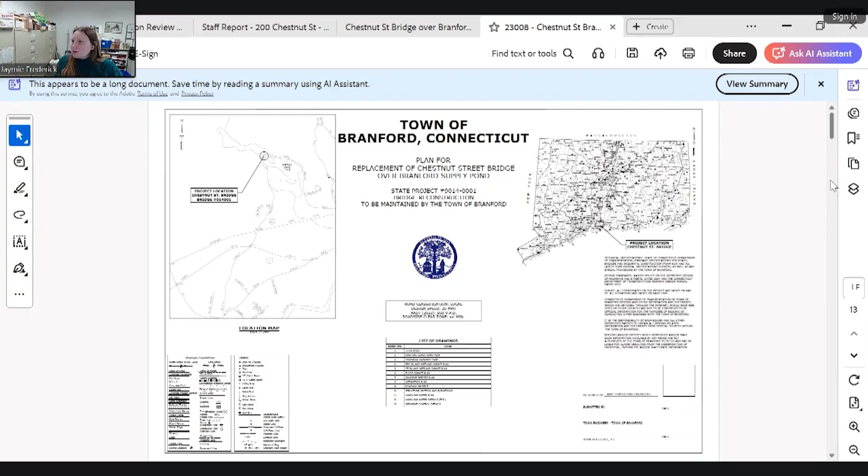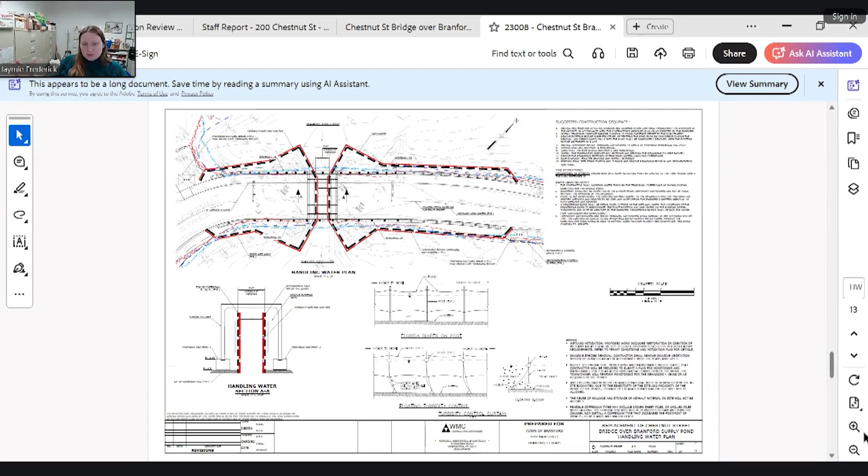While that's loading and he's pulling up the right page, I do want to identify that it has come to my attention that OpenGov defaults the attachments to be internal only, and we have to manually make them all public. There was one that we didn't make public. This should be a learning curve that gets remedied early on in OpenGov. It shouldn't be a repeating problem. So Exhibit 15 looks like it was not visible. We do have that report, and it was submitted on December 3rd. So we can walk through that afterwards.

This is Commissioner Bassermann. Jaymie, where are the emails in OpenGov? So the only email I have in here, I believe, is the one from the follow-up of the last meeting. Everything that Mr. Elder was just saying - there's an email in there somewhere? There's the email that was sent on November 14th that he was responding to verbally. The information that Mr. Elder was just talking about.

So Jaymie sent an email, which I read, and then in OpenGov was the revised site plans, because it says revised and then it has the date of when it was last updated. So there was that, and then also the project narrative. I can't remember the name of the file, but maybe it was like the project narrative or something. Let me see, those were the couple of places that I saw some. Yeah, the project narrative - it was updated today.

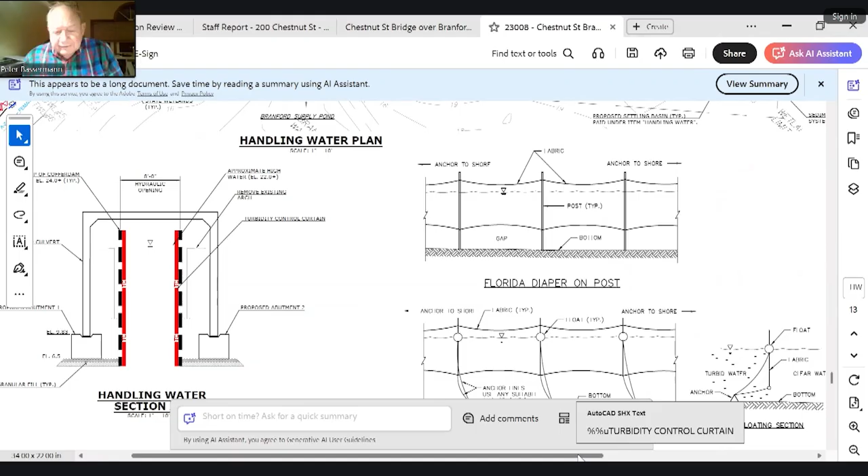This is Commissioner Bassermann again. So in the area, for instance, of mitigation, Mr. Elder indicated that there would be a mitigation application meeting, et cetera. Where do I see that? Because on the response to questions, et cetera, it says the contractor will establish a detailed plan. Is there something more recent than that that documents the fact that there will be a pre-mitigation meeting?

Jaymie Frederick, the Wetland agent. So I believe that information's in 2 different locations. Do we want to review the turbidity curtain while we're here, or do we want to jump to that question? Because I feel like I derailed where we were going by mentioning the missing document. Fine, let's get in the order of how the discussion unfolded here. But we'll deal with the turbidity comment first.

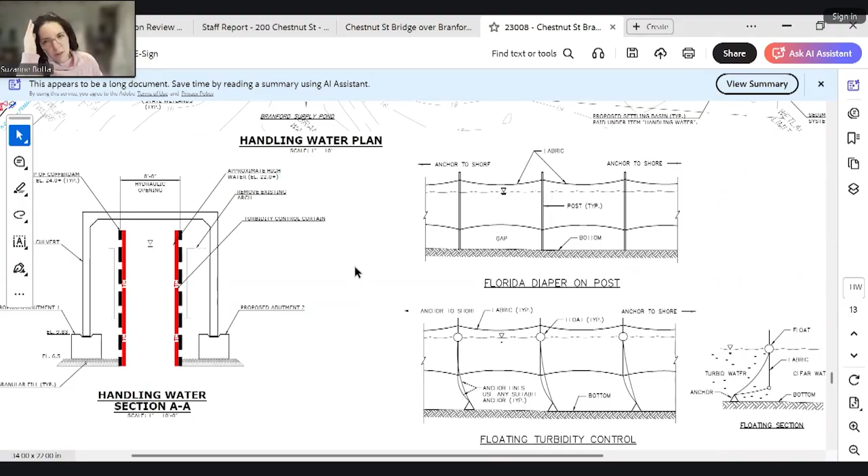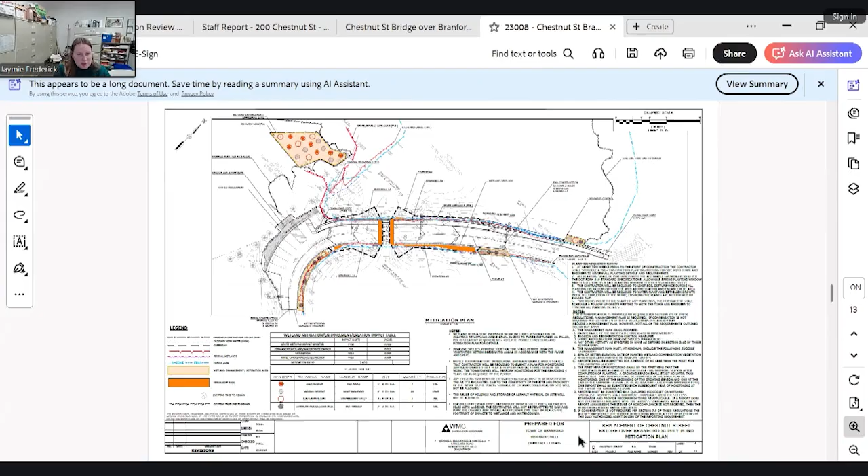This is Commissioner Bolla. You can answer that question. I have a couple, so we can come back to the turbidity curtain. Okay, so on the mitigation page of the plans, I believe that there's been additional information added. Can you just pull that page up? This is Commissioner Bolla. Thank you.

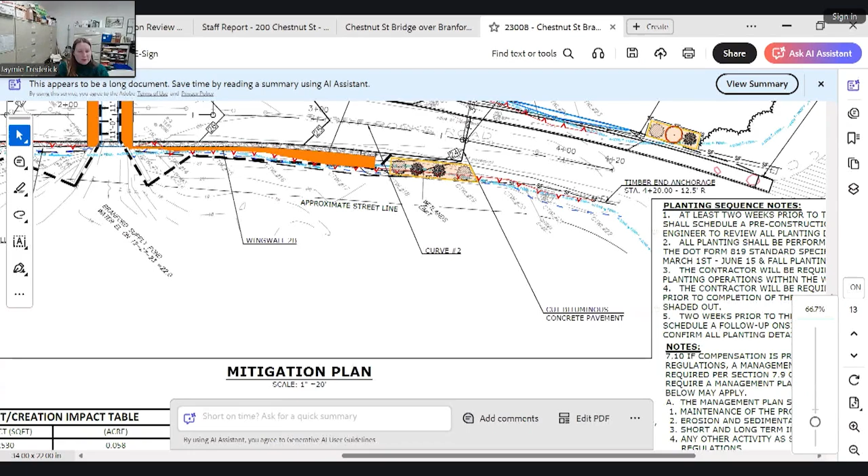As Mr. Elder identified earlier, it does call out for additional details to be provided by the contractor, so we don't have all of the information, I think it's fair to say. So I think the commission has to assess whether you have enough information at this time.

This is Commissioner Bolla. I saw in a couple of places there's this conditional language, like if this, then that, and I'm not sure why it's written that way. Generally a permit application is like, this is what we're going to do, this is what our plan is. I'm unclear as to why it's conditional and why it has to be conditional.

This is Keegan Elder again, for the record. In certain places, most jobs funded by the Department of Transportation, contractors have means and methods for which they proceed with their work. Standard operating procedure for us during design, on this project or any other state or federal project, is to come up with a plan from an engineering standpoint that is feasible for the contractor to construct, taking into account the most potentially impactful wetland or cofferdam method the contractor may elect to employ, and get a permit approved with those impacts in place, something that's feasible and constructible.

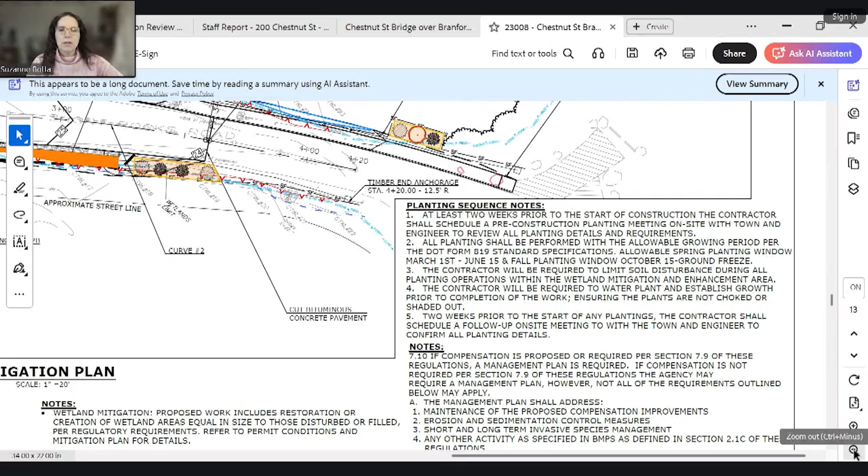It is really helpful. I'm not missing something, right? If we're all looking at this, I have a map open, but if we can all look at the same thing, what part of the mitigation sheet are you trying to look at?

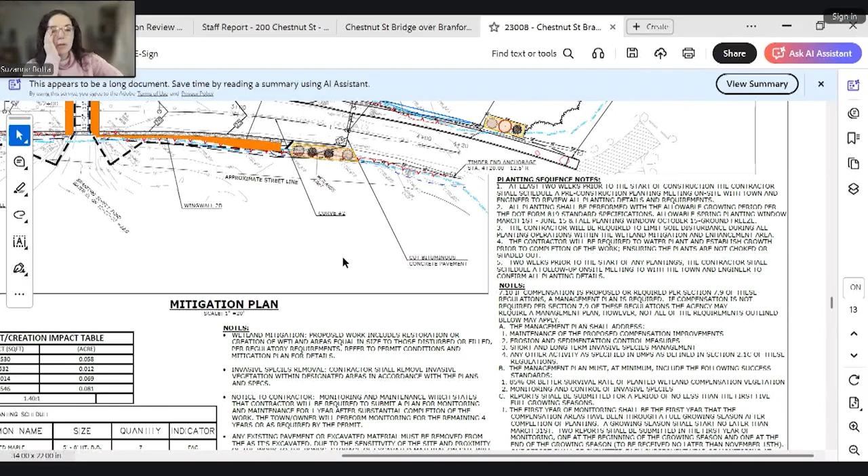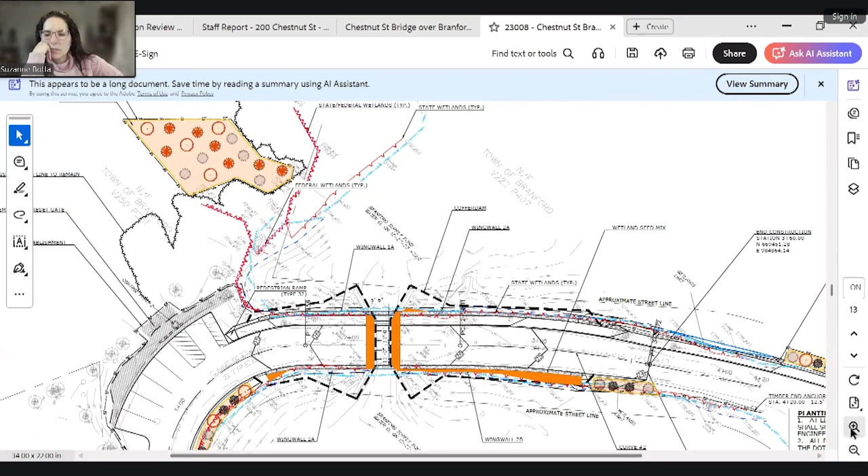So the piece that you were talking about with the Phragmites, the Phragmites removal, that would be in the wetland enhancement/mitigation area, located kind of in the upper left-hand corner of the plan. Okay, thank you.

This is Commissioner Begeman. Jaymie, it seems like when I was reading through it, there might be other times when this comes back to us for approval for various things. I'm not sure when it says must be approved, who the plans are referring to, because there are multiple permitting agencies involved. So I think that if there's something the commission specifically wants to see, that should be identified to remove any question.

This is Commissioner Begeman. To back up even further, I have a question about how the area of mitigation or invasive treatment was calculated, because my understanding is that we're going to have in this plan a 16-foot wide bridge with wing walls that go directly into the water, about 169 feet total on each side of the road, with no earth and no plants in that section. And yet in one of the maps, it was dashed yellow as mitigation area or something.

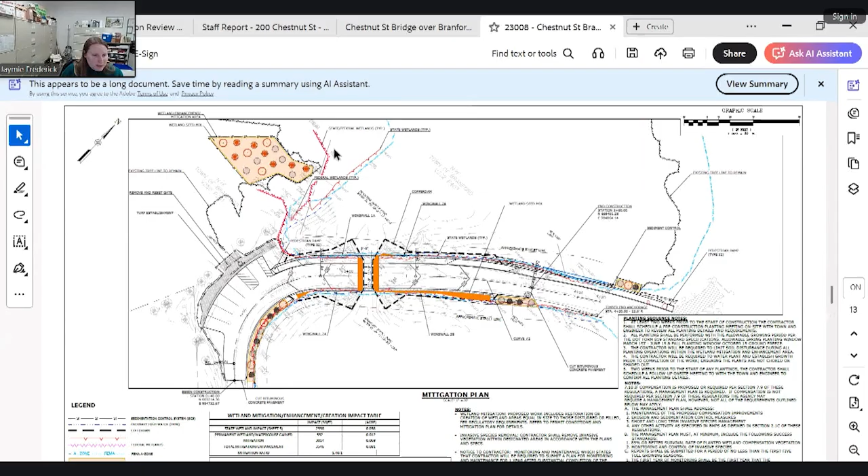It might be easier to look at the wetland impact. Commissioner Begeman, my interest is that the wetlands is getting repaired in the 1.4 to 1, because there's a significant loss. It will be a modification for sure, so there will be more open water habitat environment than there will be wetland fringe.

So the mitigation includes some areas where there will be some increase in or conversion of existing conditions. The span of the culvert is increasing, so you're going to have more watercourse in that location where you currently have the abutments for the current bridge.

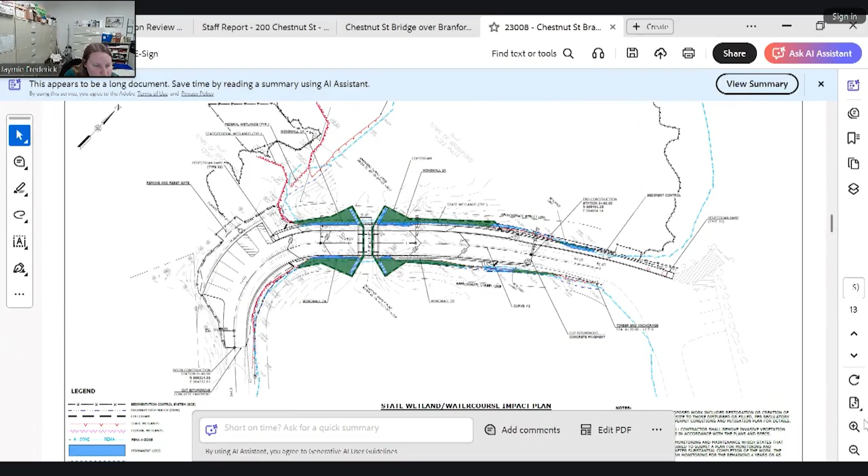The green on this is showing temporary impacts, where the water is dewatered behind the coffer dam while they're doing construction. The blue areas where the wing walls are is the permanent impact. In that green area there will be some modification, though it's hard to tell at this scale, from wetland edge to more of an open water condition.

This is Commissioner Begeman. That's a significant ecological impact to the wetland, that you're losing that number of feet on both sides of the bridge, the interface between land and open water, between water and road. We're losing that wetland, and that's a hardening of the shoreline.

So that's what I was hoping to ask the soil scientists, in terms of the environmental impact of that, and how do we make up for that impact by improving some other areas, the mitigation of the loss of that wetland, unless they're counting just open water that meets a concrete wall.

The addition—that's if that's a 1-to-1, which I don't think it is. I think it would be hard pressed to reestablish current day conditions under today's standards, because we've got the increase in road width, but also kind of the standard.

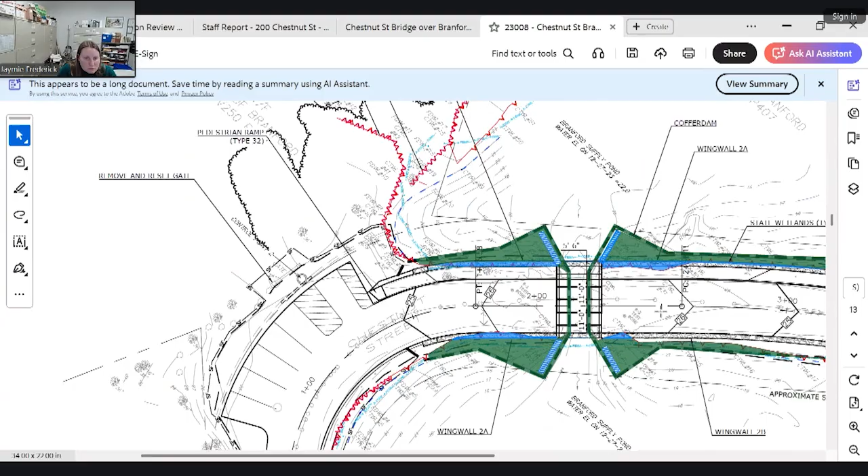Keegan, can you zoom in a little bit? You've got the mean high water line on there, and I think that would be helpful for the commissioners in reviewing where that intersects these temporary areas of disturbance. Commissioner Bolla, to Commissioner Begeman's concern—

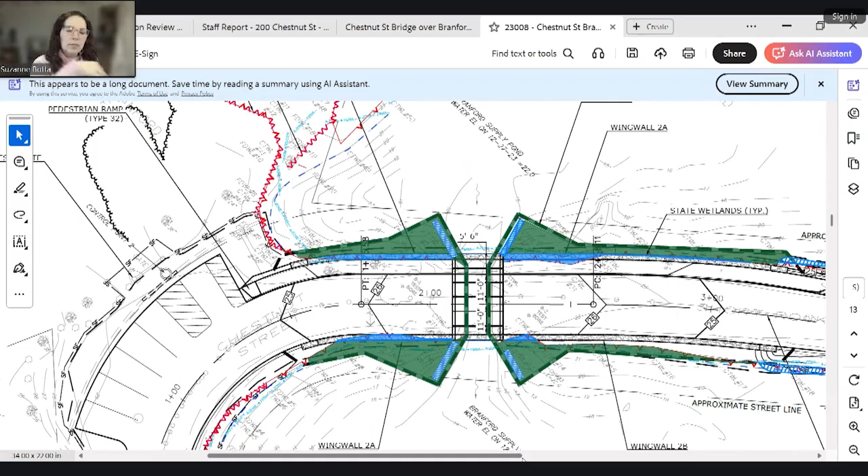Was there any consideration for including emergent vegetation since those trees are coming down in that part of the pond?

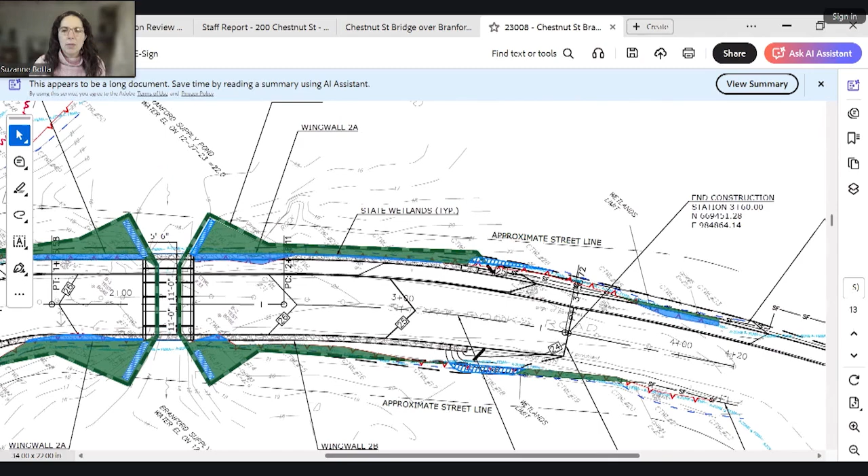Well, the trees are not necessarily coming down in the pond. Those were on the further right side of the screen. Right, there are some trees that were going to be removed where it says approximately state wetlands and approximate street line, somewhere in that area. We had talked about this corner where there's already some emergent vegetation in the summer.

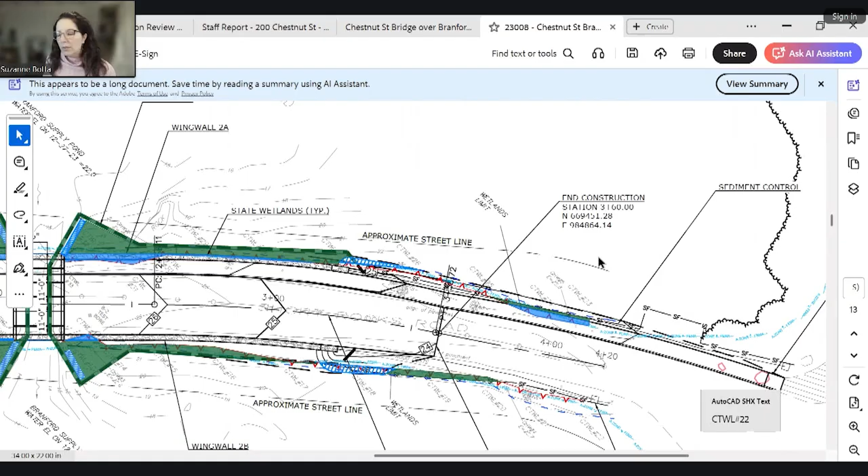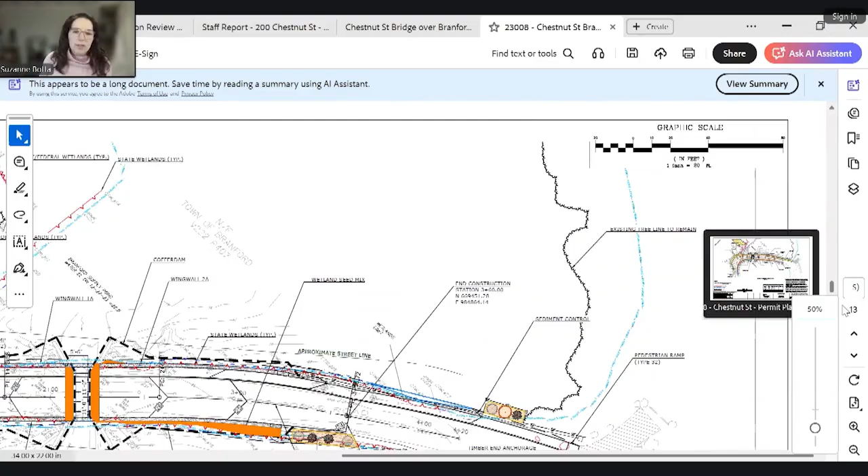There's a lot of eutrophication, so it does get very algae laden, but I'm curious if there was any consideration to adding additional emergent vegetation in the area where trees are coming down, as they're not going to provide the same kind of shading function, but they still provide some services that may offset a little bit of the impact.

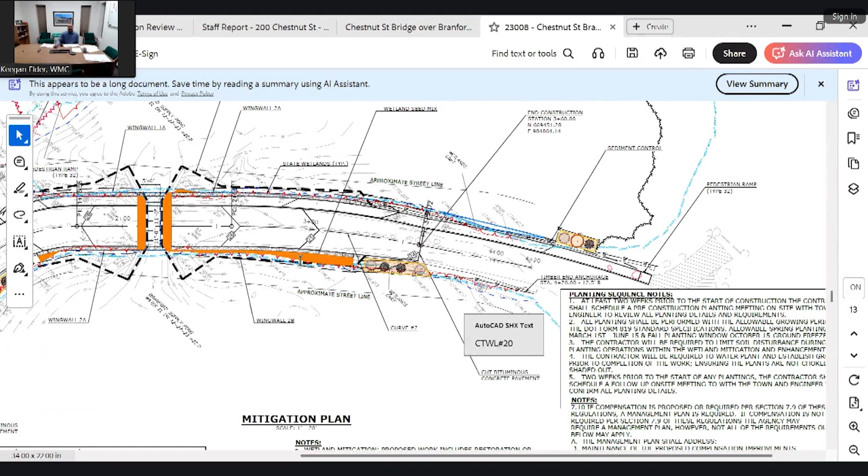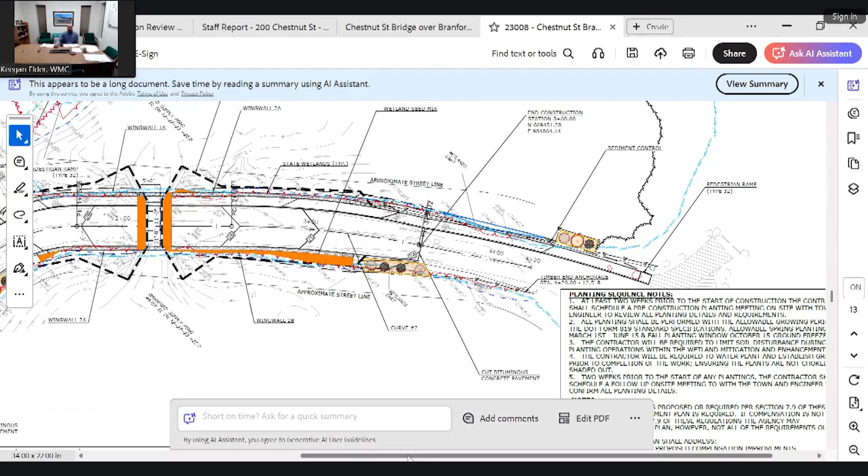Yes, this is Keegan Elder again for the record. The soil scientists did review these areas and recommended these plantings that are shown here, also in this area on the southerly, or easterly, side of the project, sorry. In addition to this area as well, in review of the canopy and what we could do to help mitigate or alleviate the loss of a few trees in the area of the walls and the bridge.

So they're shown in this location, and then also in this corner. I did talk with the soil scientist again today, and she mentioned, if we wanted to—and I spoke with John Hofferly before he left the office yesterday—if the commission wanted to add a few more trees along this area, we could do that as well.

But we're sort of limited, as we discussed at the last meeting, given the proximity of the pond to the roadway, the roadway requirements for this funding mechanism, and the guide rail and shoulder requirements. We're pretty tight and limited with how far we can go with planting trees and restoring the canopy, while still doing the due diligence of the Department of Transportation as far as roadway width, sidewalk, wall location, wall heights, and so forth. So we had a meeting of the minds with the soil scientist and came up with these additional areas for canopy on these three corners, in addition to what's shown further up.

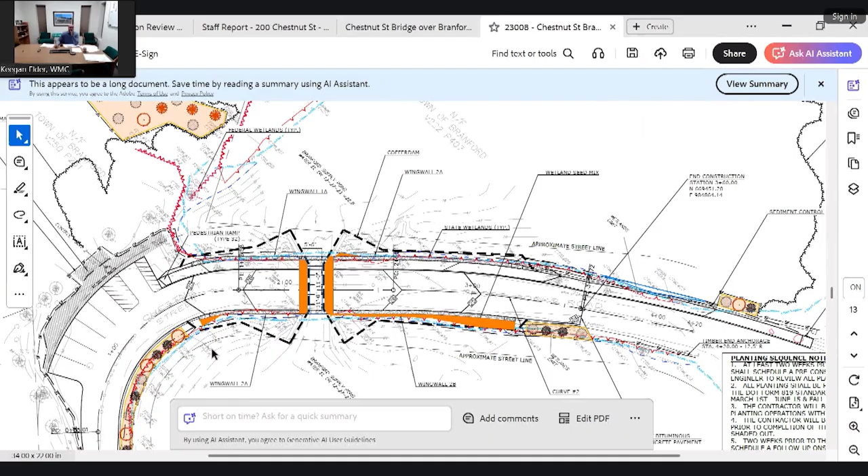This area is paved, there's a roadway, there's a lot of foot traffic through here now. There are a few trees scattered about this area, but it's not a fully grown area of trees like the remainder of the pond. But we're doing a lot to help restore whatever damage we do to that area, while keeping in mind the codes and regulations for replacing a failing bridge.

This is Commissioner Begman. Thanks for going over the alternative, because that explains the impact of going further out into the pond. Just so that I'm clear, there will be no vegetation, correct, from where the wing walls start to where they end? That is correct. Okay, just wanted to make sure.

I have a question about drainage from the road and erosion, but I don't want to go into that until people have more questions about the vegetation.

Yeah, this is Commissioner Basserman. We looked at a number of projects regarding mitigation, and unfortunately we've had a lot of learning experiences. I guess my concern is, and Jaymie, I don't know if this is a question more for you—when we say contractor, I think we've seen as part of those learning experiences that the quality of the individual supervising the installation of the material, and the frequency of the monitoring for self-correction, was important. Did we deal with that as a condition of approval, or did we want to see that as part of the plan that got permitted?

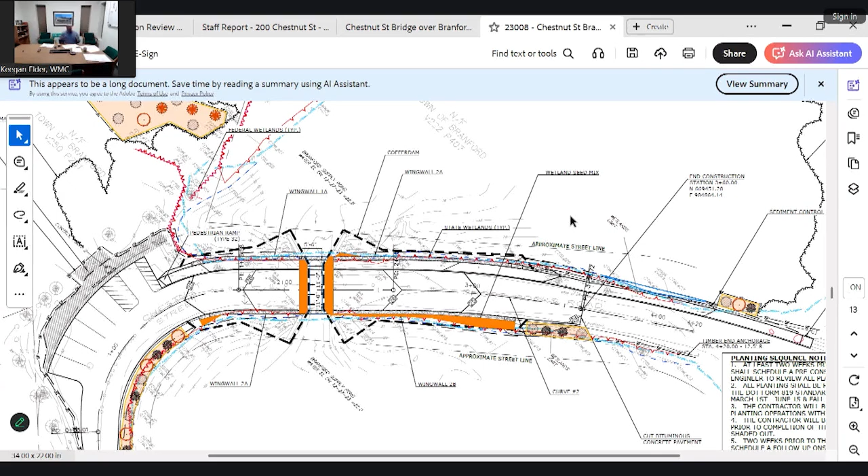So another sort of tidbit to open your eyes to how this process works. The permit plans and permit approvals are included in the bid package for the contractor's review. So any notes included in the permit plan, permit set, any permit approvals or conditions are all included in the bid documents and specification package for the contractor. He's going to get a package with construction plans that has all the details, the steel, and everything else, the engineering that goes into this bridge.

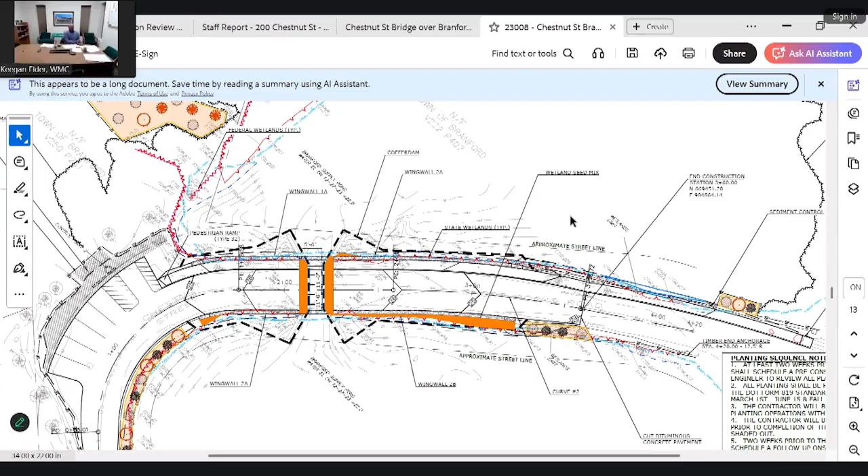He's also going to get specifications that are different from what the DOT has in their Bible. The DOT has what's called a standard specification, Form 818 or 819 at this point, which is a handbook on all construction items, what it involves, how to construct it. That's our civil engineering guideline for constructing projects. Outside of those, we have special provisions which include the invasive removal, the seed mix, the turbidity control curtains, which are atypical items in the Bible that we add specifications for in the contract.

So all of these documents, if you were to try to put them all on the plans, would be pretty crowded. But in the Form 818 or 819, the standard specification, it gives the contractor a hierarchy of things they have to follow: anything in the plans, anything in the specs, anything in the permit plans, permit conditions, permit approvals. And if the contractor varies to do anything outside those limits, rights of way acquired, or permitted limits, he has to then submit again to the commission for review and approval, any change he wants to make from any document set forth, the permit, the conditions.

When we go to DEP, they're going to have their conditions. The Army Corps already gave us theirs, well, we'll have more from them as well. We have conditions from the Department of Fisheries, U.S. Fish and Wildlife, NDDB. They all have conditions for how the contractor goes about his work that is included in the package they must follow.

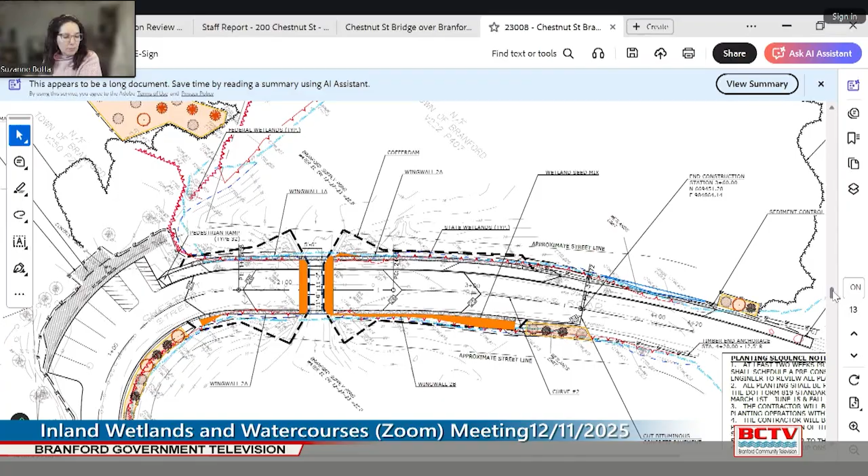This is Commissioner Bolla. I just want to return to the turbidity curtain for a minute. I know it had that standard language around using guidance from the company that makes the turbidity curtain, but we don't have a lot of call for these. So can you talk about the amount in terms of total suspended solids, the particulate size? Can you talk a little about whether there are any downsides to using this kind of method in terms of trapping organisms in one place or another, et cetera?

Without getting into the science of it... No, please get into the science of it, that would be great.

I have limited knowledge on the extra details, but what I can say is, number one, when the contractor starts work on this site, the first thing he does is set up erosion and sedimentation control and begin removal of the existing deck and roadway surface area. Species within the area generally move away or migrate to other parts of the pond, which is very large, given the amount of noise in the area.

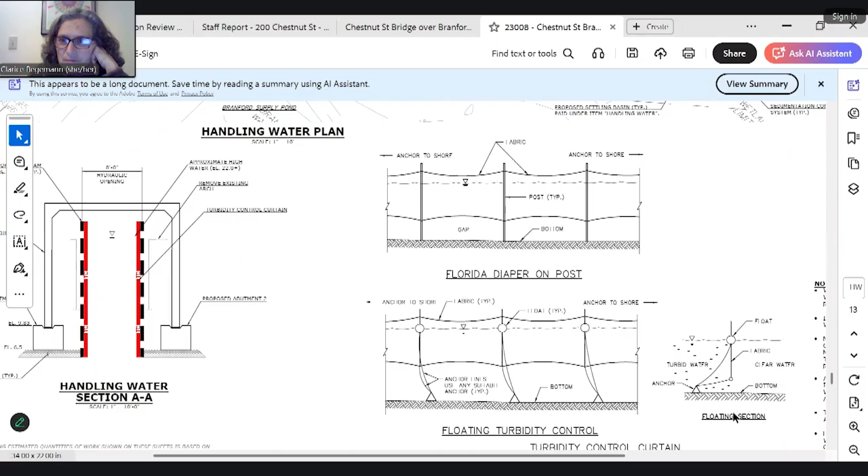So beyond the wing walls, yes, installation, so we have guide rail, there's a process aggregate base for that sort of 4-foot shelf for the guide rail I mentioned earlier. If you see on most state projects or most bridge projects where the guide rail starts at the end of the bridge, that first run of guide rail has that process aggregate base under it. And what that does, it works for two purposes.

One purpose is it alleviates erosion in those areas, but also we try to limit the amount of turf growing in those areas because it's difficult for the town or municipalities or the state to maintain. So the standard detail for guide rail shows that right at the ends of the bridges, all four corners must be protected by guide rail per the highway design manual, and that guide rail base for the installation includes that process aggregate base. In some cases, if you have a pretty steep roadway with a lot of runoff coming down, I've seen some contractors elect to use a bigger size stone, like a modified rounded riprap, just to stabilize those areas to avoid a lot of erosion. But in our scenario, this is pretty flat and relatively gentle as far as the gradient is concerned.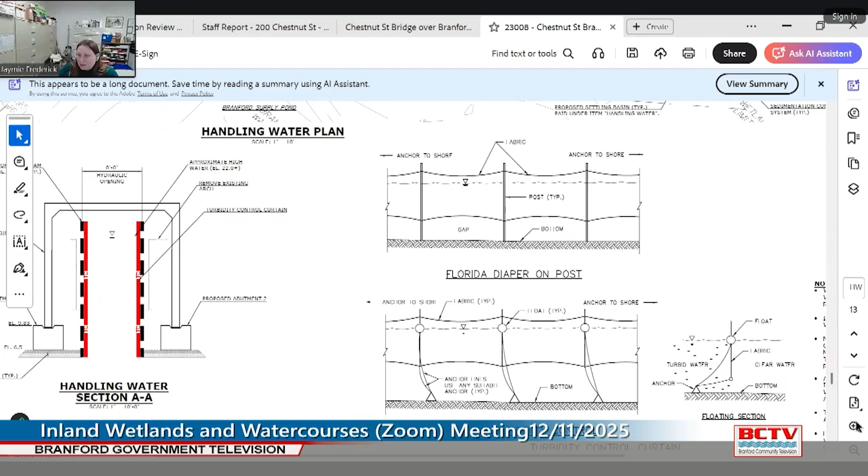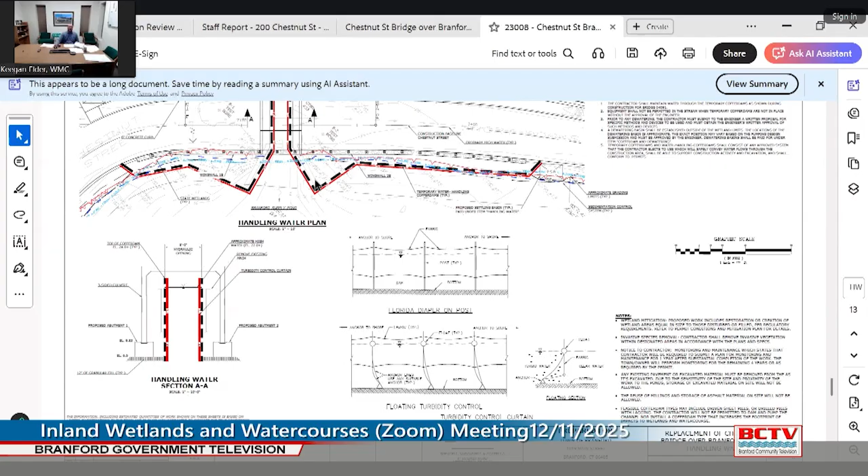Are you talking about the pumping and settling basin? I'm looking at the wrong page—I think it's the dewatering structure on the northeast. Yes, this is a pumping and settling basin, and it's a temporary structure. Any sediment or water pumped out of the cofferdam has to go through this settling basin before it's discharged, to remove the sediment.

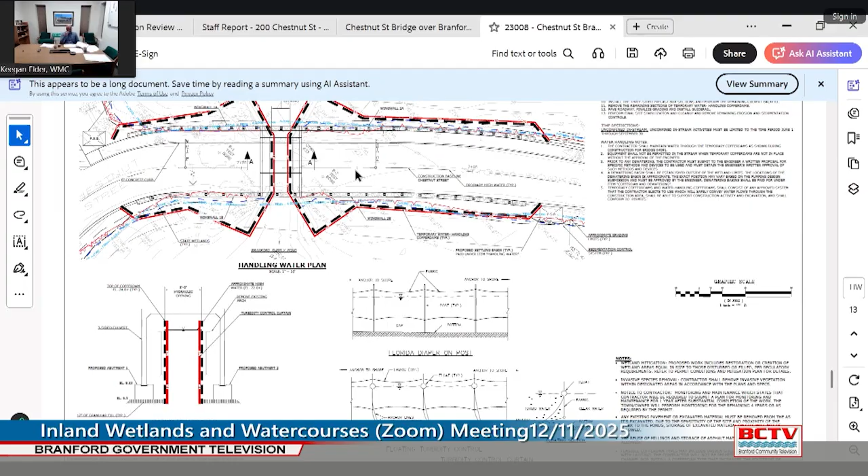Commissioner Begum asked about the northeast, the far lower right where wing wall 2B ends, where that temporary pumping station is—that's where the new plants are going to go. They'll be hit with more concentrated flows than plants elsewhere, since that water used to dissipate over a much larger area. She said she's a bit concerned about how successful that planting area will be, and noted that if they don't survive, there would be more erosion.

I could find some other projects we've done in similar scenarios with plantings and share pictures with the commission showing how it developed over the years. We've been doing this for a long time—if it's done right and correctly, the success rate for regrowth is there. The state wouldn't mandate it in their specifications and guidelines for bridge replacements if it didn't work.

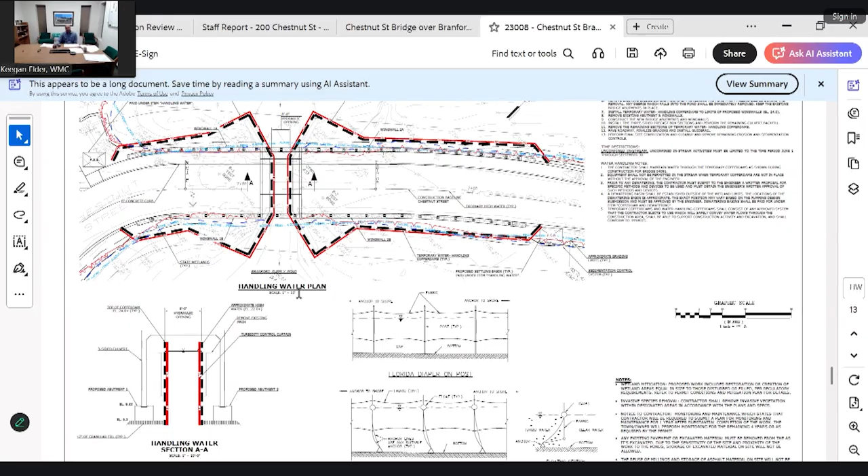This was a comment by one of the commissioners at the last meeting, to include the turbidity control curtains, and I agree that was a good call—something lacking in the previous submittal—to help alleviate some of the sediment that would get dredged up during construction.

This is Commissioner Bassermann. Jamie, the staff report that was prepared for this evening looks like it probably needs some update. Is that a fair statement, or are you comfortable with the document as it was prepared for this commission to consider?

Jaymie Frederick, the wetland agent. So the staff report, like I said, the applicant submitted a marked up staff report with some response to comments. The staff report that I prepared for this night's meeting did not have conditions for approval, consideration for conditions. I don't generally do that until after the commission's closed the public hearing and given me some direction as to where they want things to be.

That being said, if the commission is thinking about starting to head in that direction, I have some thoughts, but I also realize there's been a lot of information to digest, and I don't know where the commission has landed, or if they have landed on whether or not there's sufficient information. There's been a lot of comments that information can be provided. I'm not sure as to the timing of that information, whether we're looking at continuation and submission for the next meeting, or, like the applicant has requested, looking at conditions of approval.

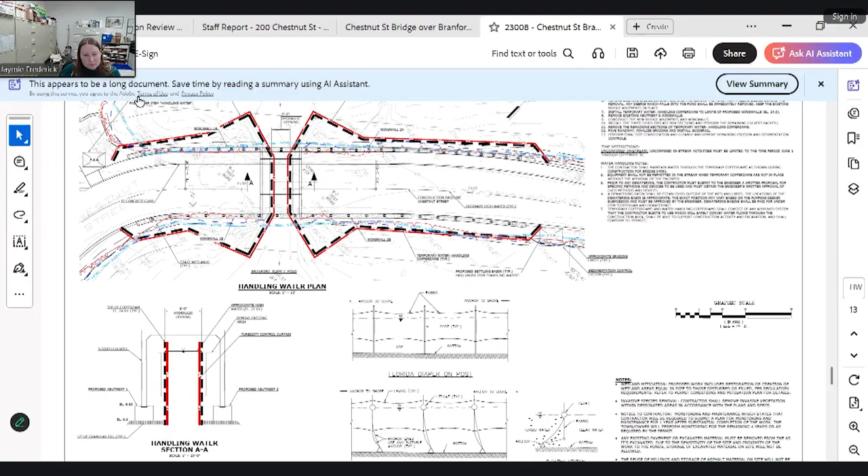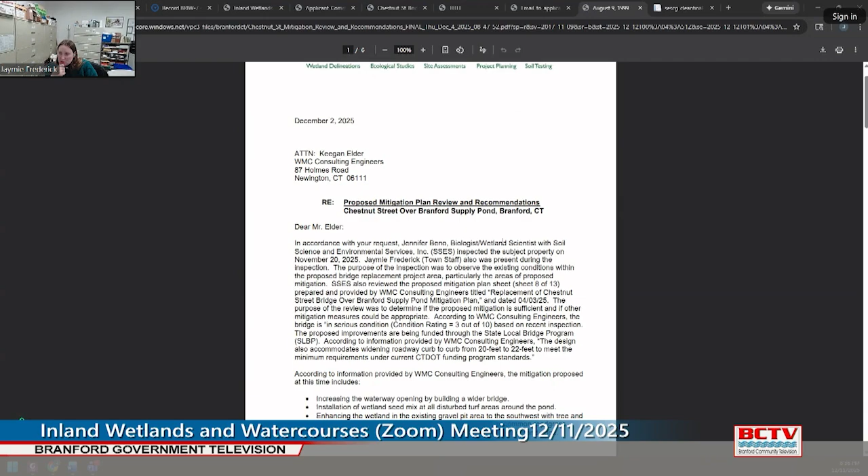Jaymie Frederick, Inland Wetland Agent, let me screen share that real quick. So Jennifer Beno with Soil Science and Environmental Services Inc. went out, and like Keegan mentioned, they've had some conversations. I also met with Jennifer out at the site, and she's had some conversations with Keegan and reviewed some revised mitigation that the commission has also been looking at this evening, and these are generally her comments based on her observations out on the site and review of those revised materials.

I'll just give commissioners a couple minutes to read it. No? And, or identify what you want to do. We have a lot of information that came in last minute here. And for us to consider a project like this with the impact on the wetlands, the mitigation issues, etc., I'm not feeling a rush to close this thing tonight.

I do think it would be beneficial if the commission—I know that we've already been on this topic for an hour and a half, hour and 40 minutes—if you can take a quick look at it to see if there's any additional things. Because I think if we're requesting a continuance, we need to be able to summarize all of the information that we're looking for.

This is Commissioner Boda. Just a thought, which is, I don't think in my experience with the hearings and how we've done things in the past that we would render a decision this evening. We don't have a full report. We don't have the conditions lined up. Typically, our process is to kind of get those ducks in a row, send it back, and then at the next meeting, make a decision.

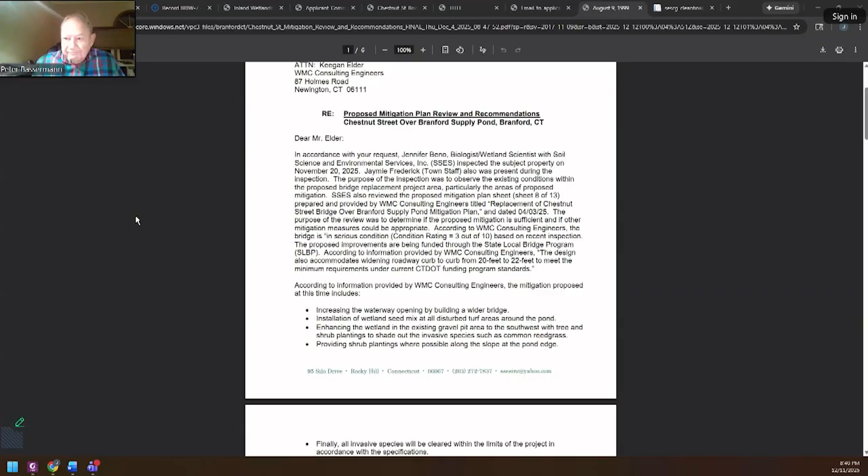Where are the other commissioners on the issue of continuation as opposed to trying to close this tonight? I'd like to hear from everyone. Commissioner Armstrong: I'm in favor of the continuance to get the additional information. Commissioner Bengman: I agree. Commissioner Sotomayor: I agree as well, it would be in our favor to have some more time to review the information that was received late this week. Commissioner Gokowski: I feel the same.

All right, okay. Jamie Frederick, is the applicant amenable to that? Keegan Elder for the record: yes, whatever the commission needs from us to move forward towards an approval, we'll be amenable. Commissioner Bassermann: do we need to now go through that list, Jamie?

Jaymie Frederick, the Wetland agent: Keegan, if you can send me an email stating in writing that you consent to continuation of the public hearing to the January 8th meeting, that would be great. So we've got the mitigation plan, which would include invasive species as well, mitigation plan for implementation and monitoring, I'm assuming. Some minor revisions to include all time restrictions on the site plan, include timing for installation of the turbidity curtain.

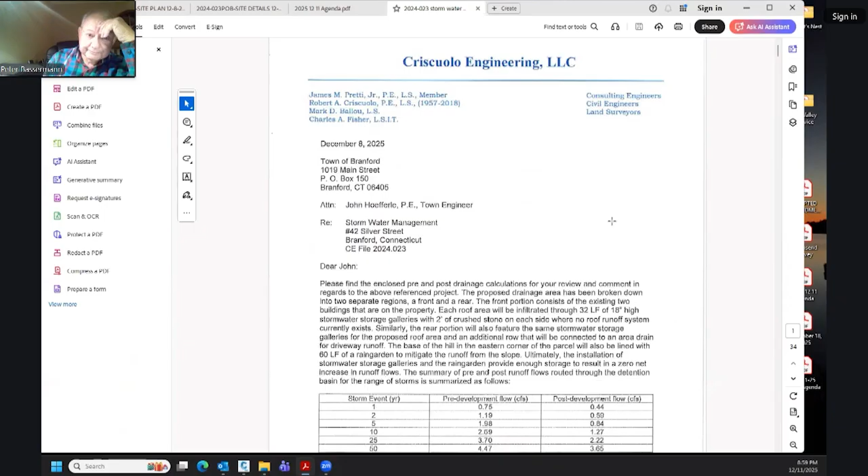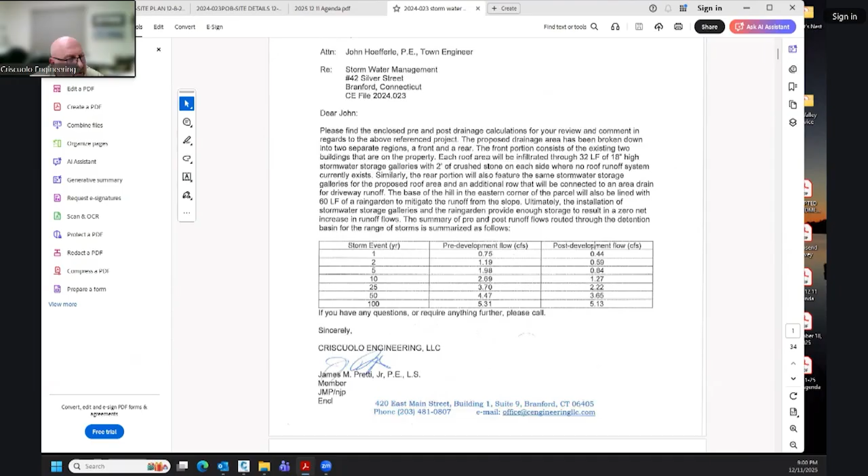So we are slightly reducing the runoff. You are correct, there is a high point, sort of a saddle, on that upper portion of the lot. All the pavement area is going toward the road, not toward the rear. Let's see if I go to...

I think we've done probably as good a job as can be done here. If you've looked through the report, the model is very complicated because of all these separate items, but I think the town engineer was satisfied with how we did it.

As far as the gravel paving, we're coming up a slope to this upper area here, and I think that's problematic. I think they're going to end up with stone all running down the driveway and into the various areas, so I think that's a mistake here.

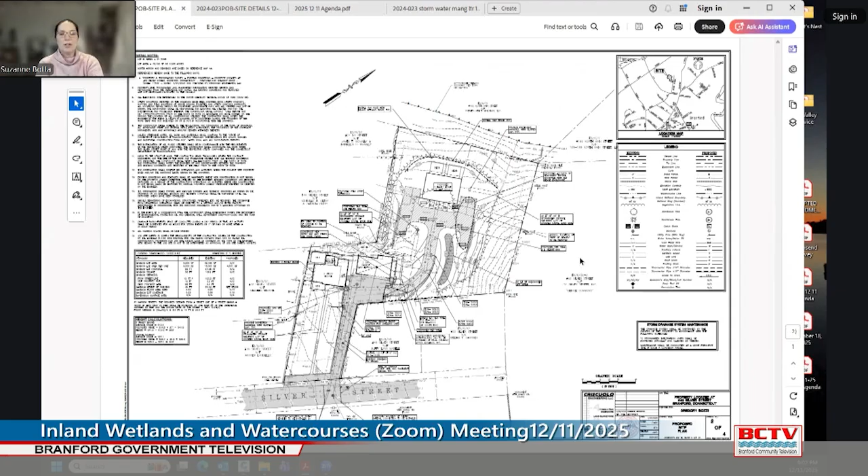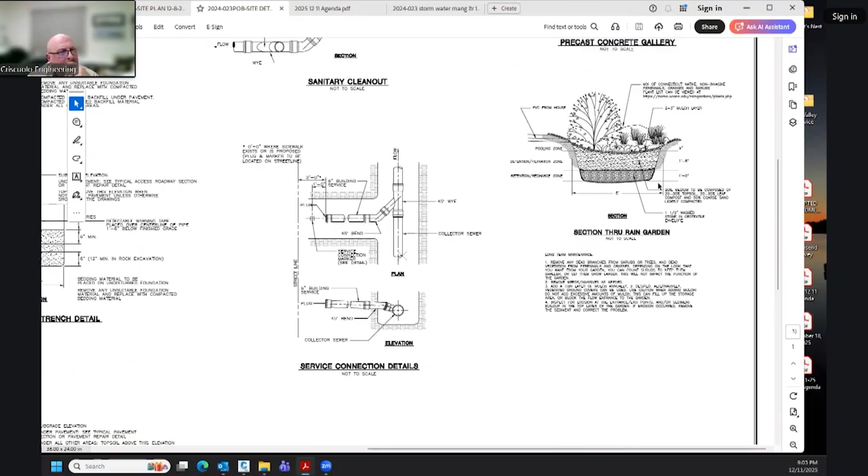How deep is it? It's about 1.5 feet of that mix that a lot of places sell now because of these rain gardens, and then there's stone wrapped in fabric at the bottom. So it's about 2.5 feet total, with a little depressed area for surface water, good to give it a chance to get in the ground. This detail originally came from the UConn site as well.

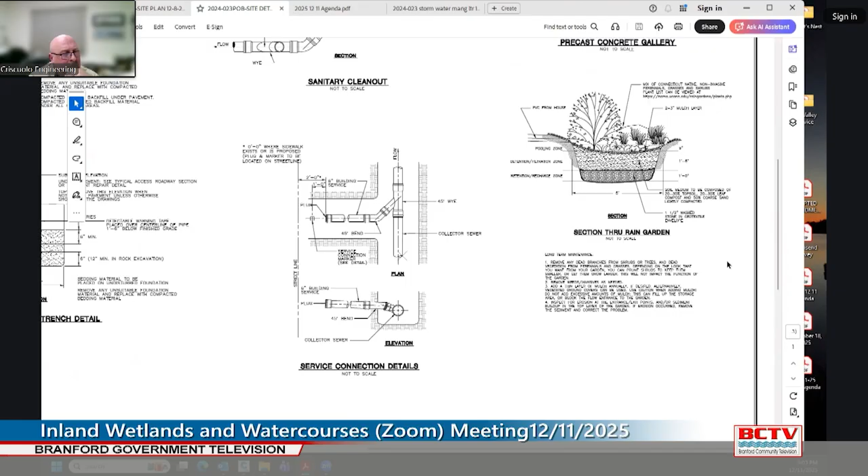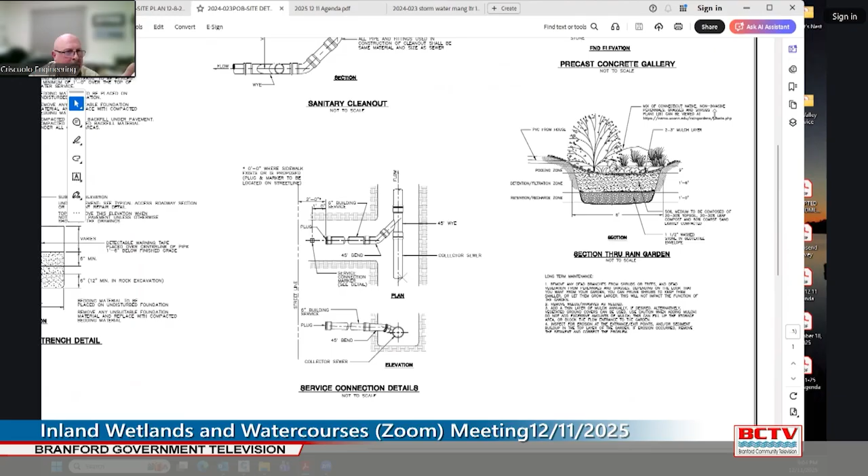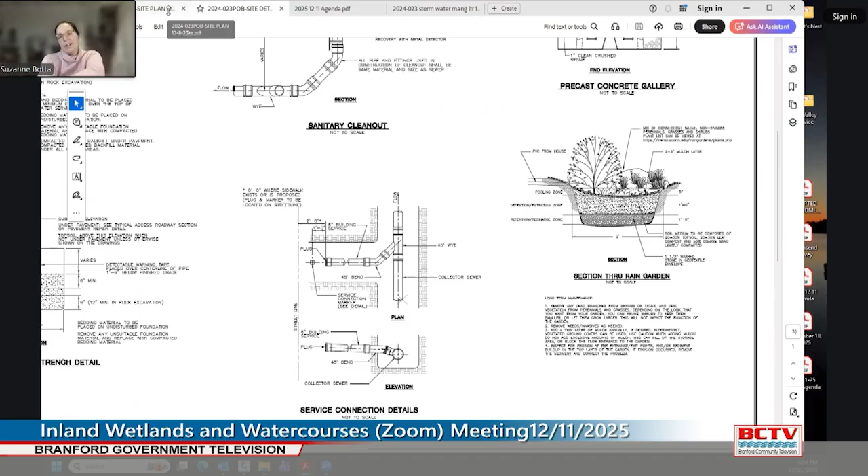Jaymie Frederick, wetland agent: I do have a possible condition for consideration that the planting plan be reviewed by the authorized agent. Yeah, and that's fair. I mean, I don't know what the owner wants to put in here, but we give them a list to pick from, and there's a whole bunch of plants there. So when the commissioner decides, then we'll submit it before he puts them in. Yeah, they don't want to put the wrong stuff in there, or it'll just die. Agreed.

Commissioner Bassermann: Jamie, you want to take us through those possible conditions that might surface? Any other questions or comments on this?

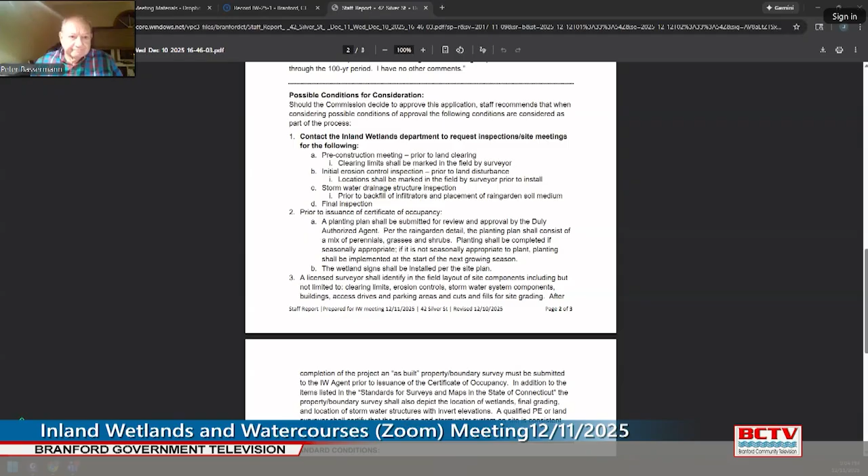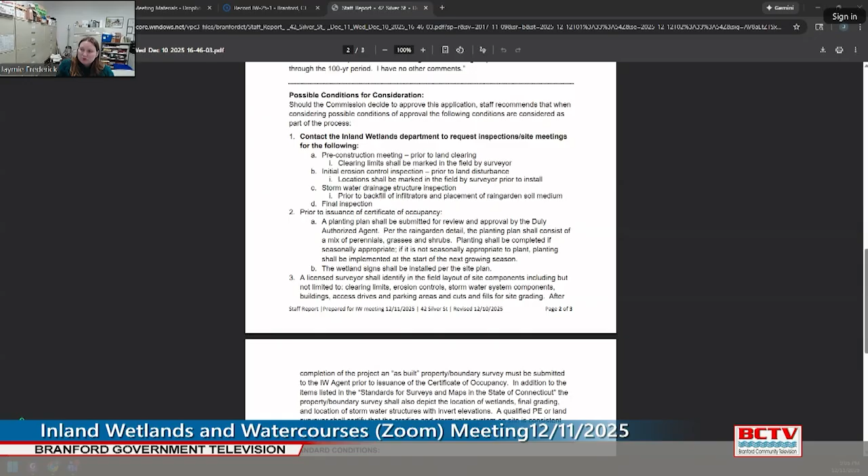Jaymie Frederick, wetland agent: For standard inspection and site meetings, we've got pre-construction, erosion control, stormwater drainage structure inspection, and final inspection. Prior to issuance of a certificate of occupancy, a planting plan shall be submitted for review and approval by the duly authorized agent. Per the rain garden detail, the planting plan shall consist of a mix of perennials, grasses, and shrubs. Planting shall be completed if seasonally appropriate; if it is not seasonally appropriate to plant, planting shall be implemented at the start of the next growing season. And B, the wetland signs shall be installed per the site plan. And then the last one is 3, which is our standard language for an as-built.

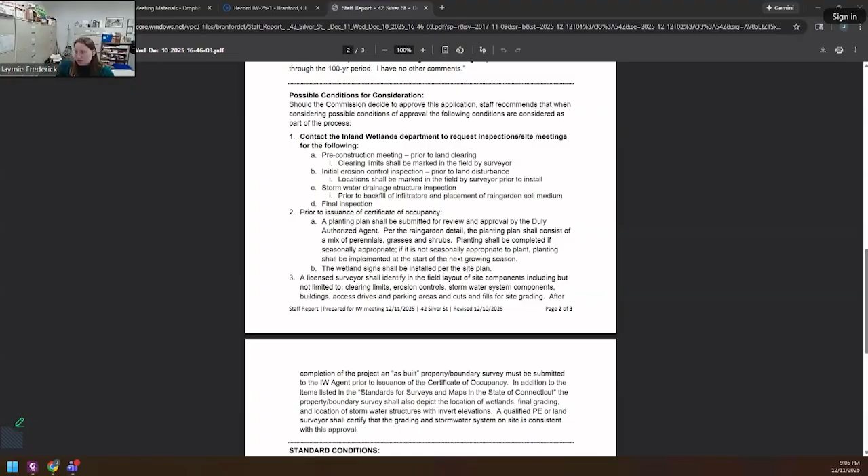Any commissioner feel that we need to add any additional possible considerations?

Is there an opportunity to make a motion on 25.09.03, 42 Silver Street?

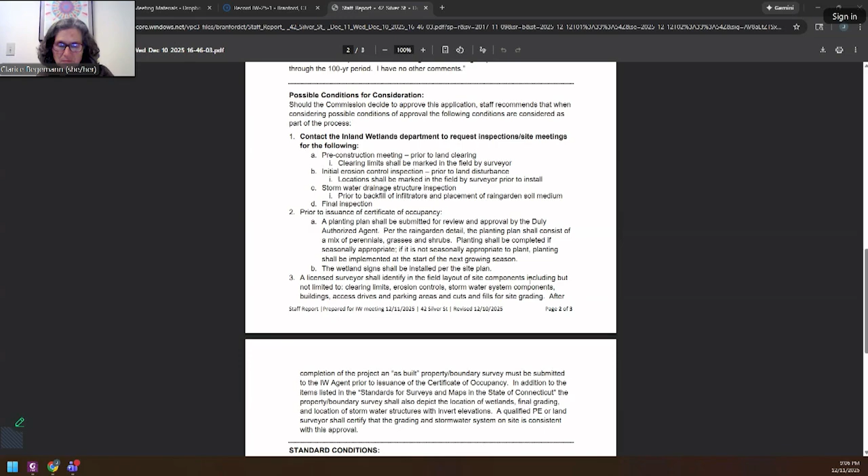Commissioner Bolla asked about the rain garden: in the past, when there were limits of clearing, markers were used indicating a conservation area. Is there a way to ensure the rain garden is maintained as such, and that this is communicated as the property is bought and sold over the years, so future homeowners understand the area is intentional and goes with the property?

Jaymie Frederick, the wetland agent, responded that the proposal requires special exception approval, which must be filed on the land record, so anyone doing their due diligence should be aware there's an approved plan they should be looking at.

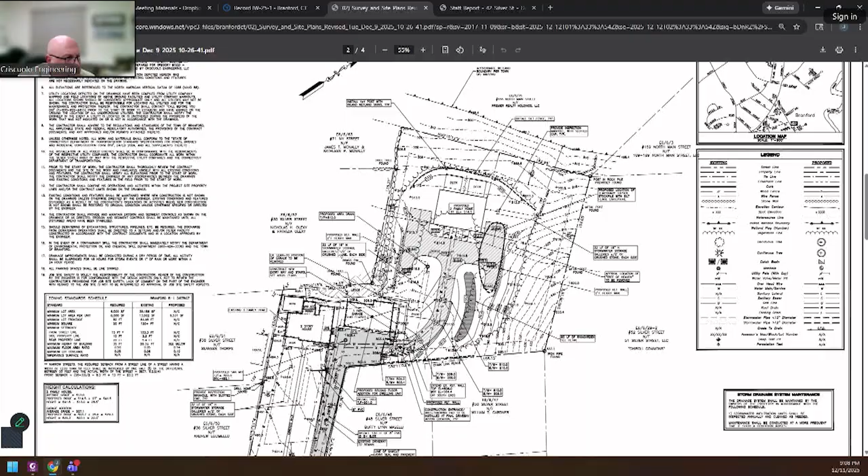He explained they've added notes stating that the proposed stormwater management measures installed on the site are considered permanent fixtures. The property owner is responsible for their continued maintenance in accordance with the published schedule and for preserving their continued functionality. The measures cannot be filled in, abandoned, left in disrepair, or otherwise altered without prior consent of the Town Inland Wetlands Commission.

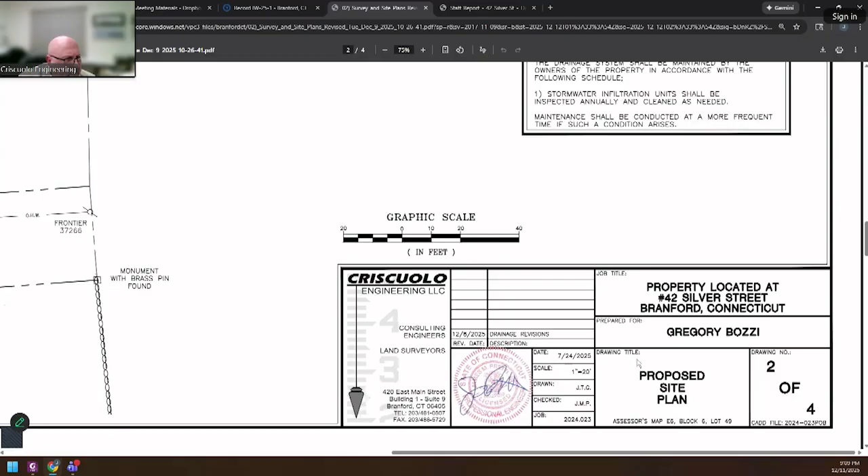The condition would include language furnished by Mr. Peretti regarding the permanence of the stormwater management, particularly the rain garden. Jaymie was asked if that was too vague or appropriate enough to work, and confirmed it would work.

Commissioner Bolla then made a motion to approve Inland Wetland 25.09.03, 42 Silver Street, with the conditions dated in the staff report, dated 12/11/2025, including all conditions and possible conditions for consideration to be conditions for approval.

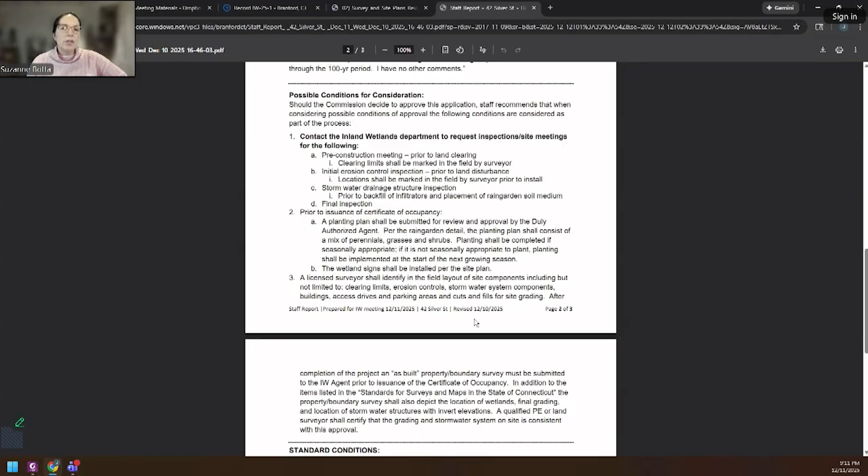The motion included the addition of a 2.C condition, which will include language provided by Mr. Peretti to ensure the maintenance and perpetuity of the stormwater management, in particular the rain garden, as well as the standard conditions and general provisions in the issuance of all permits.

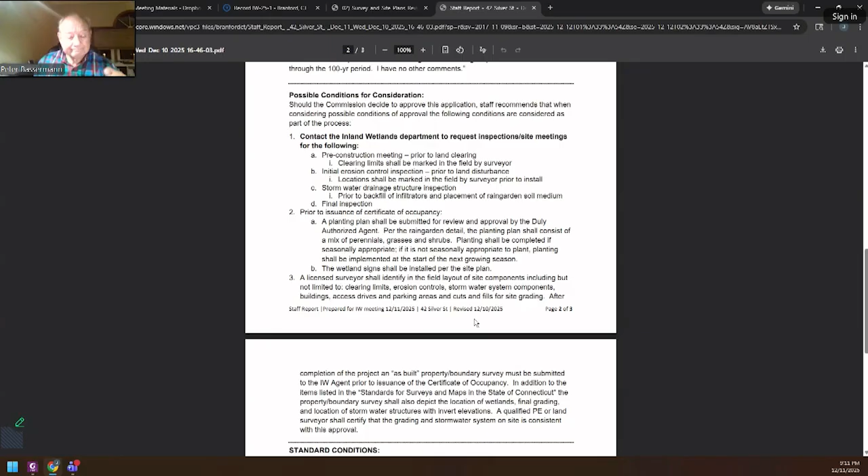Peretti noted he cut and pasted the language into an email to send to Jamie, who could edit it as needed. It was clarified that a vote was still required, and the motion was confirmed to be on the table, with a call for a second.

Commissioner Sotomayor seconded the motion. With no further discussion, a roll call vote was taken.

Commissioner Boda, aye. Commissioner Sotomayor, aye. Commissioner Armstrong, aye. Commissioner Gokowski, aye. Commissioner Bageman, aye. The motion passed.

Commissioner Bolla asked Jamie to save that language for future use, noting they may want to tweak it a little, but liked it, especially that it goes on the land record.

The commission moved to an application for receipt, Inland Wetland 25-3, 14 Long Point Road, replacing the existing septic tank and modifying its location. Since there's generally no presentation for this, it was received for the evening only.

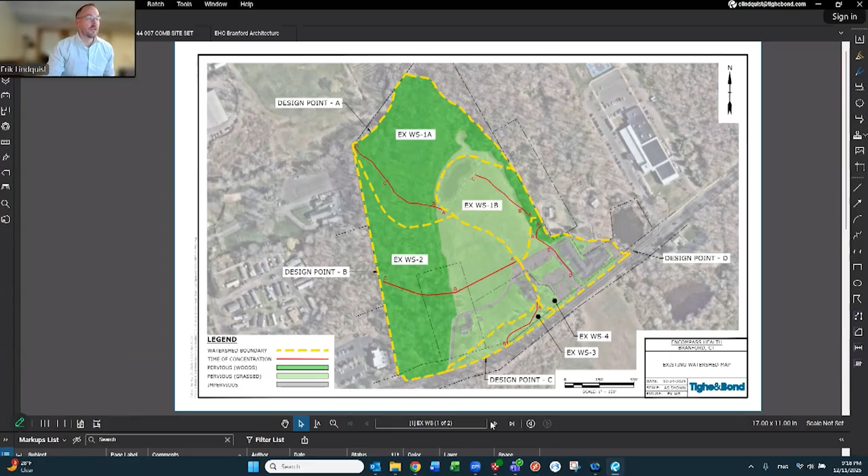Wetland and drainage patterns will mimic the existing condition. I'll quickly show you the existing condition — it's broken up into essentially 3 areas that go out to the back, plus a couple in the front. As I switch to the other sheet, you can see they're pretty much completely maintained for the project, so we're not impacting any of the other wetlands on site. That's a high-level overview of the drainage approach. I could go into further detail on how the pond is designed if you have questions, but I'll leave it there for now as a high-level introduction to this proposal.

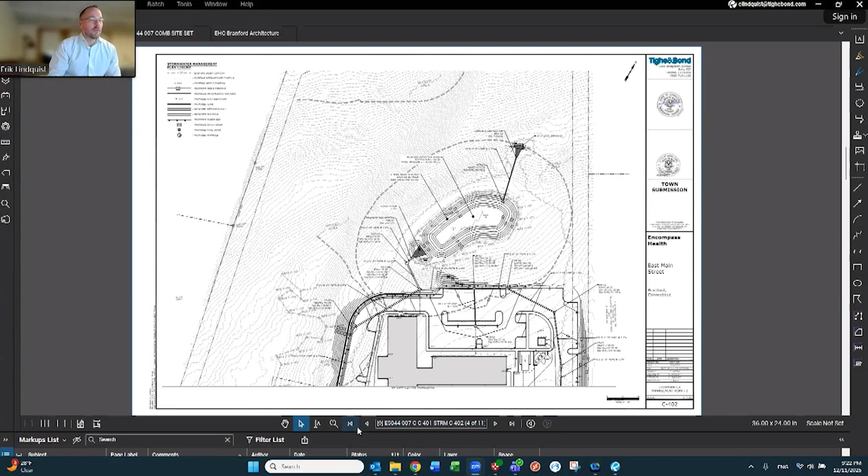There will be one other discharge over here, in a very small area. If I go to the watershed map, I can show you how small that is—just this little tiny area. I did that because we didn't want to increase runoff to the state system, so we captured this. This will be a water quality inlet structure, so we'll be getting treatment, and that'll also discharge to a level spreader going to the wetlands. Everything else will either be going into our pond, or very small areas out in front of the site will be draining towards the Post Road or East Main Street like they currently do—just reduced in flow because we're taking more of that flow to the rear.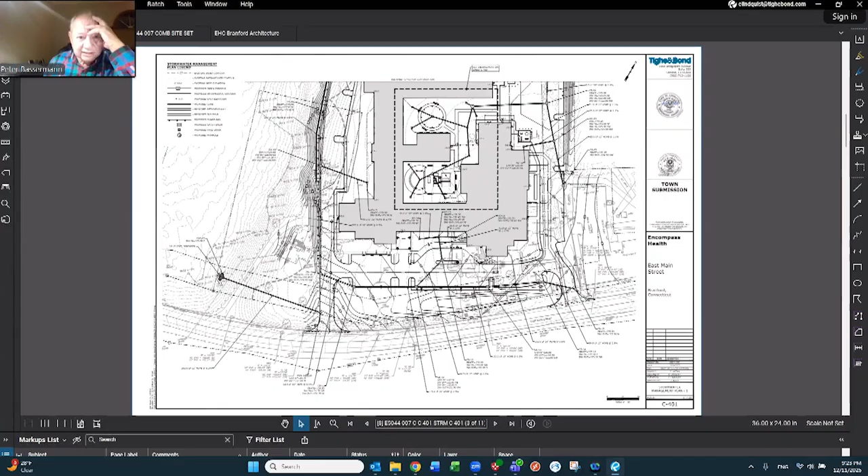This is Commissioner Bassermann—and the other wetlands on the site are where? I can go back to the first page to show this clearly—actually maybe the second page so you can see the site with it. There's a wetland along the western side of the site over here. There's also wetlands down by the Branford River, just off the north end of the site, with an associated wetland system. There's also another man-made impoundment over in this area, which is essentially where the property line wraps around. We're not touching that, and we're not touching this existing driveway which services these two parcels. That'll be maintained through our site. We'd be demolishing the existing building here and planting it with grass and trees, making it green instead of a building.

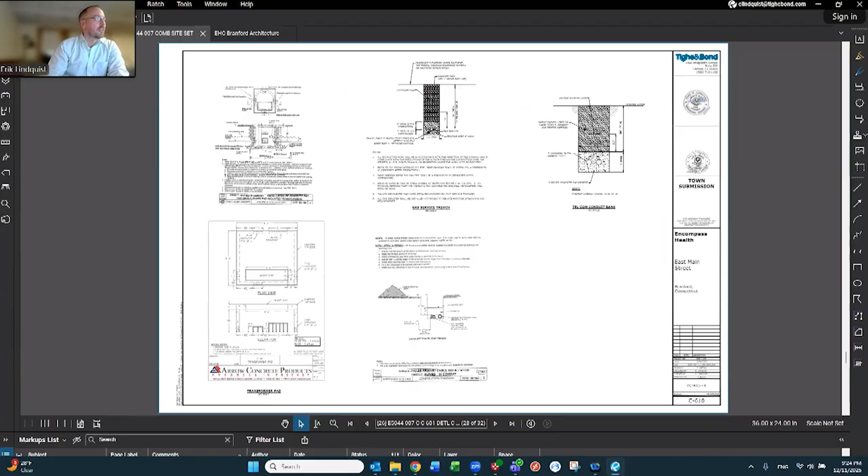One further question, Commissioner Bassermann: in terms of the regrading of the pond, what would the slope be when done, inside the pond? It'll vary—I believe it's between 1 and 3, and 1 and 4. I can go to the sheet in the back which will show a section of the pond. Let me just go to this one. That's fine.

So this is an exaggerated scale, so it looks a lot more than it really is. But through here, it'll show you the slopes on the pond. So it's a 3-on-1 through here, and then there's the aquatic bench, which is where a lot of the plantings will be right at the permanent pool elevation. That's a 6-on-1, and then it's back to a 3-on-1 within the pond. So it's a 3-on-1 to shelf to 3-on-1.

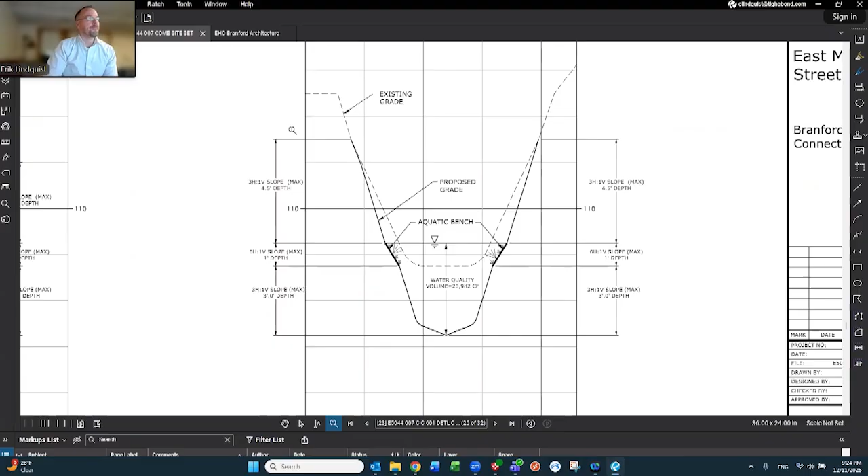This is Commissioner Goclowski. If my memory serves me correctly, that man-made pond was done when the property owner was thinking about putting a pirates museum on the property. That is correct. That's correct. Yes.

Personally speaking, I've visited the Encompass building up in Danbury, and I have to say they did a phenomenal job building that structure. If they do half of what they did up in Danbury in Branford, it's going to be an absolutely gorgeous piece of property. Absolutely gorgeous. It's a very similar project, I worked on that one as well. It's got a wall on one side - that one had 2, this one only has 1. But it's going to be a very similar footprint and a very similar approach to how we do it. If anyone wants to see the building, this is essentially what the building will look like right here. It's a really attractive building.

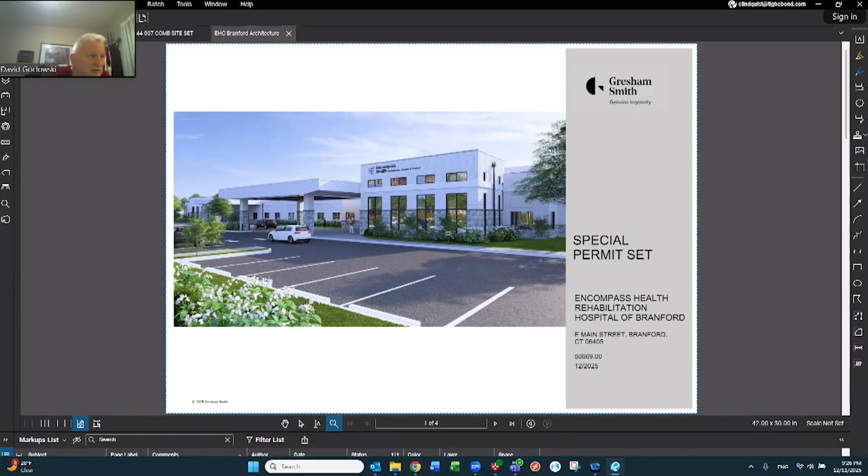And I'm also glad you're not touching the wetlands, because that happens to be a nice area of the property to walk around. Yeah, like I said, we wanted to minimize our impact out here and keep it to the disturbed areas as much as we could. Thank you.

That being said, not all stormwater basins are the same. So I would just suggest that the applicant might want to provide, and maybe you have, because I haven't looked through everything, but consider providing some more information in that regard. And I do just want to identify that because there is that 17,800 square feet of activity in a wetland, section 7.9 does apply to the application, as would section 7.10. So I just wanted to make sure that that was clear.

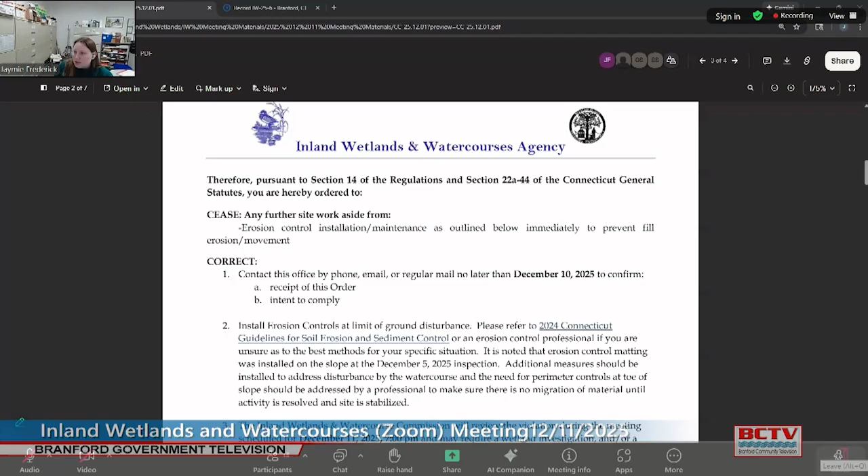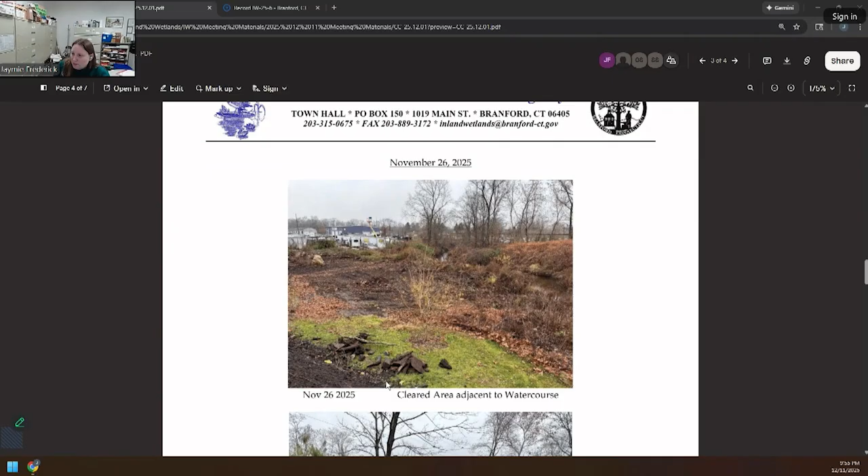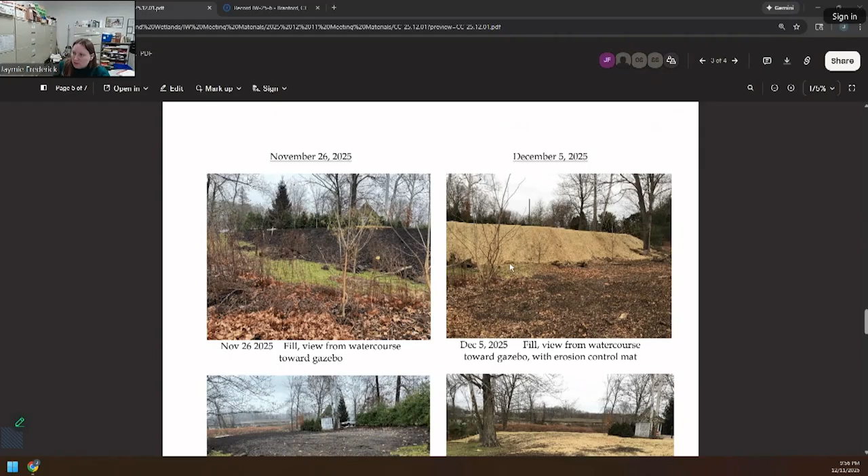I'm going to jump down to some photos. This is the area I was talking about that we're requesting get mulched. This is the Branford River. This is the toe of slope from before the matting was installed. This is the fill looking from the watercourse. And this is from that cleared area down by the watercourse, looking back at the fill after the blanket had been installed. That's a quick high-level overview.

They've been directed to stop work and either come up with a restoration plan or a permit application, essentially. They've also been directed to give us a time frame for when they think they might need to come up with that plan. Any questions before I hand it over?

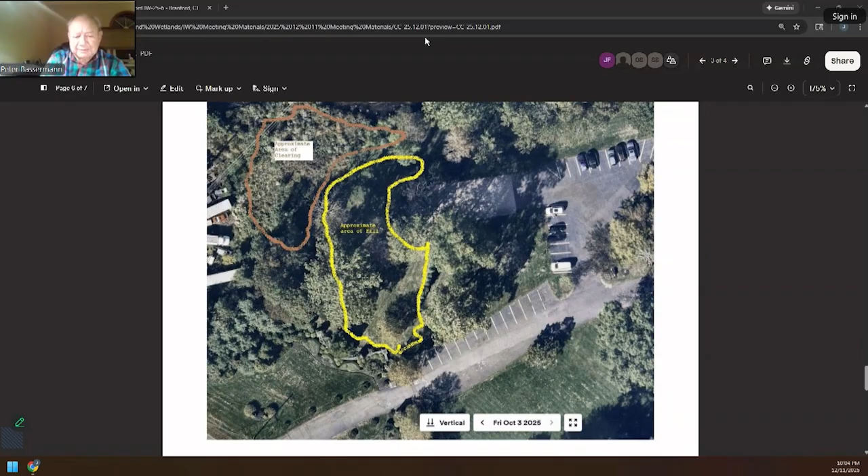This is Commissioner Bassermann. Refresh me again on the 10-day requirement, Jamie.

Statutorily, the commission must hold a show cause hearing within 10 days of issuing a cease and correct order. That's essentially so that the person in receipt of the order has the opportunity to demonstrate why they feel an order should or should not be upheld, and/or any concerns they have with the content of the order. And also for the commission to review that order and see if you have any direction on whether there should be any modifications to that order. So generally speaking, the commission will initially affirm the things in the order and/or modify or lift it if everything's been satisfied or the commission deems it's not a violation.

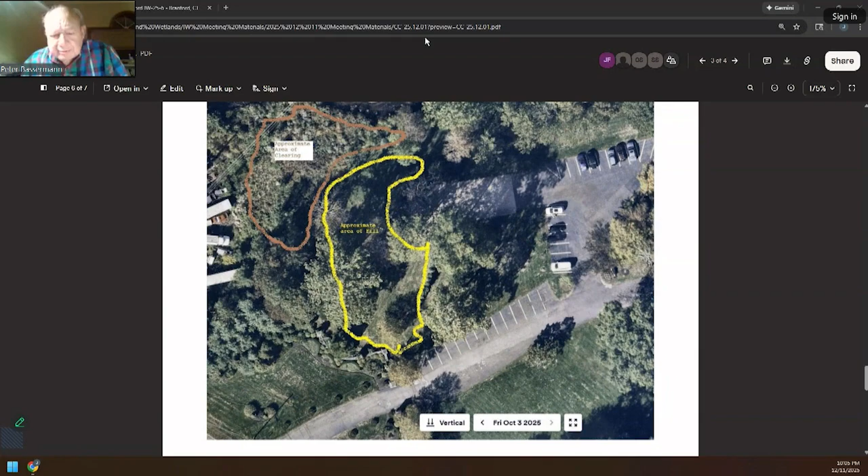But the commission, can you post the email that was sent? The letter? Yes, or the letter, I'm sorry. And I mean, I understand the 10-day order.

We're currently at 4, so we're at somewhat of a disadvantage, mostly because you folks aren't meeting again. I know you're now doing a special meeting next week, but you didn't have a regularly scheduled meeting again this month, so we're on 4 days.

Yeah, and I believe, I don't want to put words in Ms. Frederick's mouth, but I think my client has been more than conciliatory to try to correct any issues she has concerns with.

Just so we understand it, the cease and correct was issued on the 1st, and this is 10 days later, and we're having the meeting, so we met the statutory obligation, correct? It was issued on Monday. It was issued on the 8th.

Then how do we get 2512-01? Because it's the first cease and correct order issued in December. But sometimes we get multiple cease and correct orders on the same day. All right, got it.

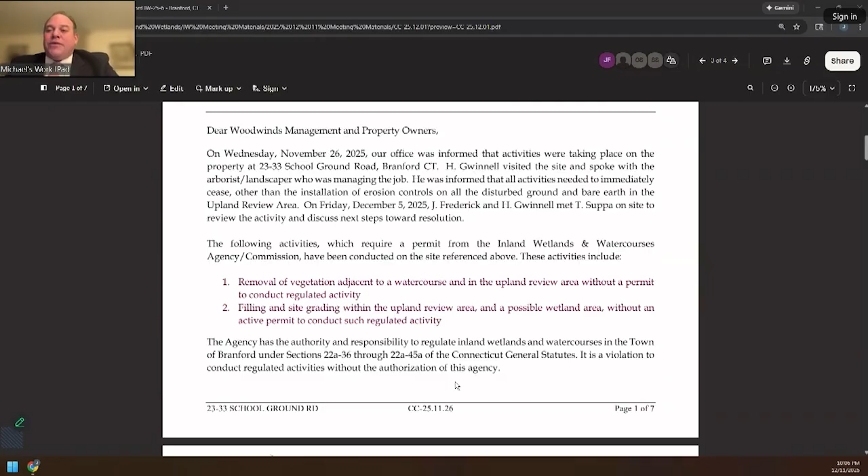No, I understand, and my client understands the constrictions of December, but we're here in good faith, and we're trying to, and again, I don't want to put any words in Ms. Frederick's mouth, but my client has been trying to alleviate her concerns as much as he can in the 4-day period that we've had. Jaymie Frederick, Inland Wetland Agent.

I will say we've been in correspondence longer than that 4-day period, but this letter has only been out a brief period of time. That being said, I am happy with the response I've received to date.

I think the next step is, when do we need to touch base again? If I had to fast track one thing, make one priority for next steps, it's having that wetland delineation done, so we can have that information relative to what the next steps will look like as far as getting the site into compliance, whether a straight application is acceptable or if there's going to have to be a mitigation restoration component to the plan.

This is Commissioner Bassermann, but as the letter indicates in item 3, we certainly have a choice to make tonight as to what's the level of professional scientists we need. And I guess what you're saying is, given the fact that there is not a delineated wetland, we need a licensed soil scientist to do that work.

Yeah, so I think tonight the first step is for the commission to agree or disagree with step 3. I am suggesting a wetland scientist needs to do a wetland delineation, and that ultimately, if Woodwind's looking to keep the condition, or keep a modified version of the condition, they would have to submit an application for that activity. I would suggest that should be on a formal site plan, as required per the regulations, especially given the amount of fill and the steepness of the slope, which I think currently exceeds the zoning regulations. So they should be looking to bring it into compliance at minimum with that.

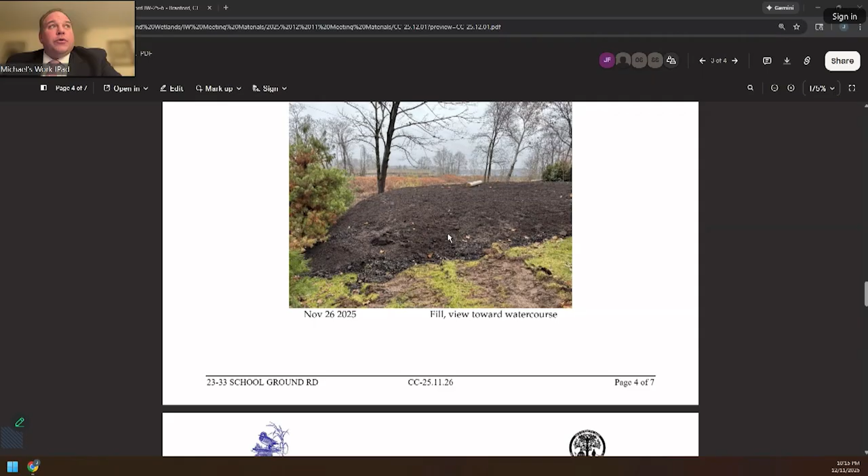Frederick, the wetland agent, to Heather's point, I would recommend that Woodwinds reach out to us, particularly after you get that wetland delineation done, just so we can start talking about next steps, so you know you're heading in the right direction, and we can loop you in on some of the regulations you probably want to be concerned with as you design. Happy to work with you. We'll have our landscape architect reach out to you once we have the wetlands delineated.

So Jamie, Frederick, the wetland agent, continuing the show cause hearing to February 12th. And I'll send out a letter outlining the points we just discussed so everyone has something to refer to. And I'll give you my email because I didn't have an appearance.

All right, so I'll include you when I send that out. I appreciate it, thank you very much. And Michael, thank you for hanging in for the amount of time that you did to get to your item. It's been a night, but it's okay.